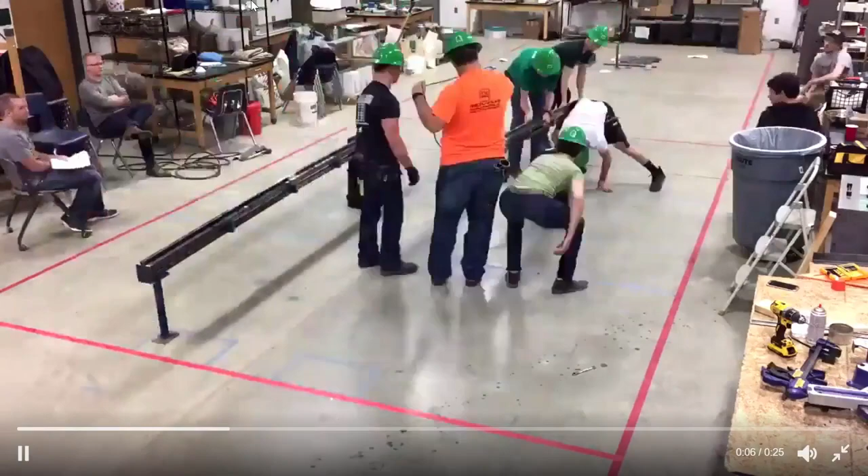Speaking of, I figured I'd show everybody. Here you can see this is back in the old engineering building. They've set up the staging yard, and you can see they're doing the construction. You can kind of see how they built it, they actually sort of built it diagonally and then just lifted it across. Ultimately, what took the longest time really was the bracing more than anything. The lateral system was a little more intricate than the main body of the bridge.

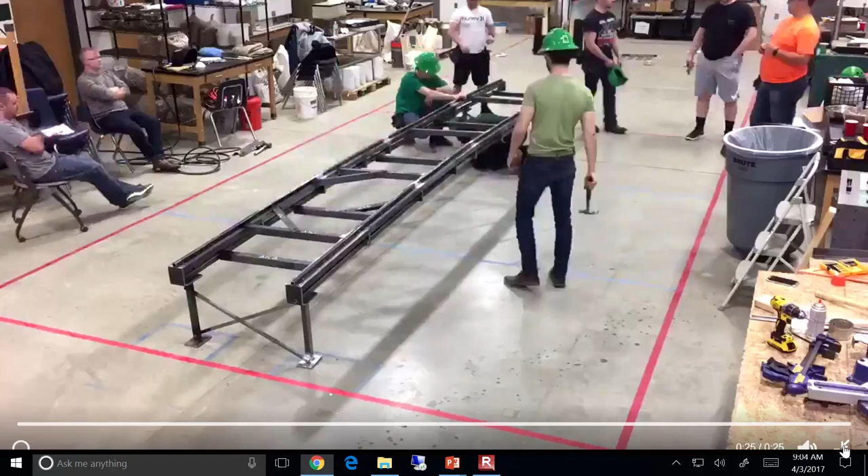But in the end, we scored fourth. We had a very respectable score on overall cost. Last year, I pulled the numbers to make sure I was accurate, and last year that overall cost would have gotten us to nationals. We had some really tight competition this year, but all in all, the students did very well.

My final message is that for those of you who'll be here next year, my dare for you is to do better. In other words, the bridge this year got a cost of, what was it, $26 million? So you all do better, you know what I mean? So if you're interested, now's the time to get involved, now that you maybe have a little bit of experience with steel, bolts, welds, columns, beams, and whatnot, you can help out. But the team did a great job, and I was tickled.

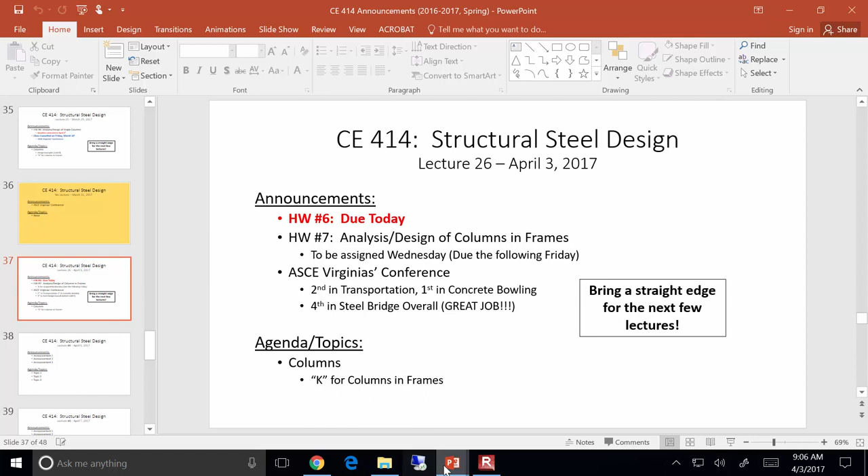With that, let's get into our discussion today of columns and frames. Okay, so last time we discussed the difference between a singular column and a column that's part of a larger frame. If you recall, we had braced frames and moment frames, really the 2 big lateral resisting systems to consider.

The big thing is that this column, for instance, in this braced frame, is designed differently than, let's say, some of these columns back here. Some of those columns are just part of the gravity load resisting system of the building, so they're all sort of designed as if they're individual. In most cases, you can take K to equal 1 and just go with it.

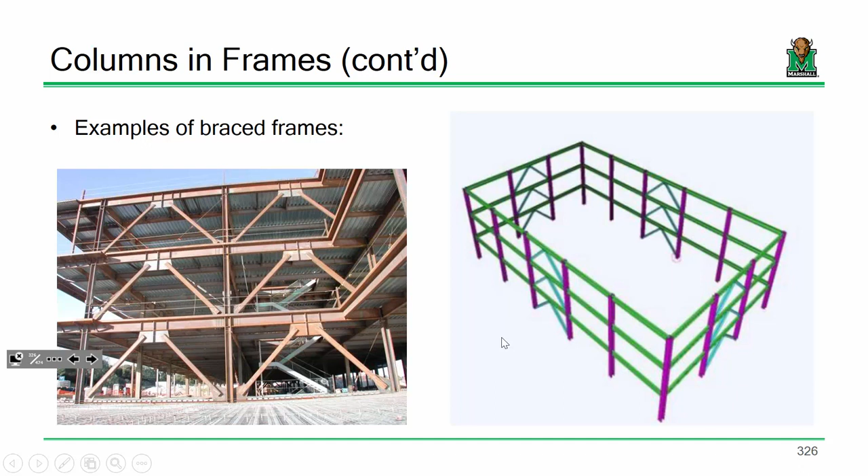But brace frames and moment frames are handled a little differently. Now, is everybody clear on the difference between what a brace frame is and what a moment frame is? Is everybody okay with that difference? Everybody good? Okay.

Now, one other main identification I want you all to be able to make is the difference between a simple shear connection and a moment connection. These moment connections on the right are the ones you'll see in moment frames. The big difference is that for a moment connection, your flanges are connected to the column as well. For a simple shear connection, you're only connecting the web, so that connection is there just to transmit shear, not moment.

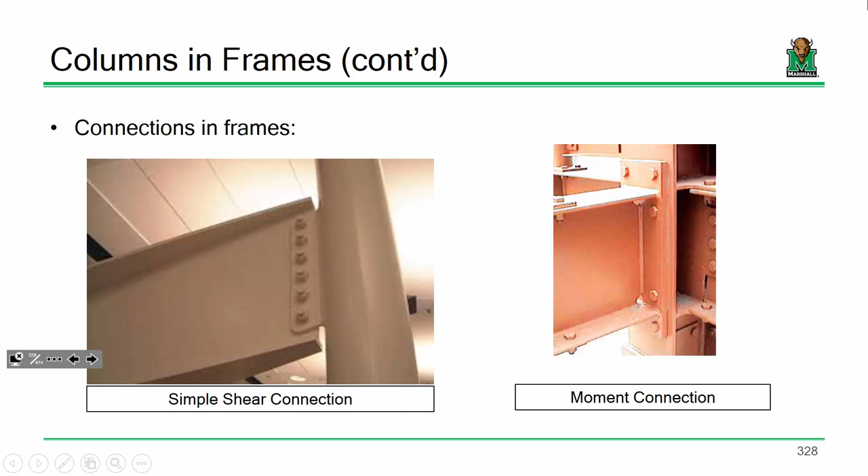Sound good? Okay. Now, I wanted to go back to this. I want to identify a couple of analytical effective length cases and relate that to how columns in frames behave.

I want to start this analysis by looking at case A and case B. Case A is a column fully fixed on the top and fully fixed on the bottom. If you do the analysis and solve the differential equations that I know you all love to solve - remember, what's the college student's number one tool for solving diffy-q? Was it Wolfram Alpha, right? I know things.

For a fully fixed column, theory states that your effective length factor K is 0.5. Now, if you take one of those supports - top or bottom, doesn't matter - and pin it, the column gets a little more flexible and buckles under a lower load. We represent that through a larger effective length factor - in this case, 0.7.

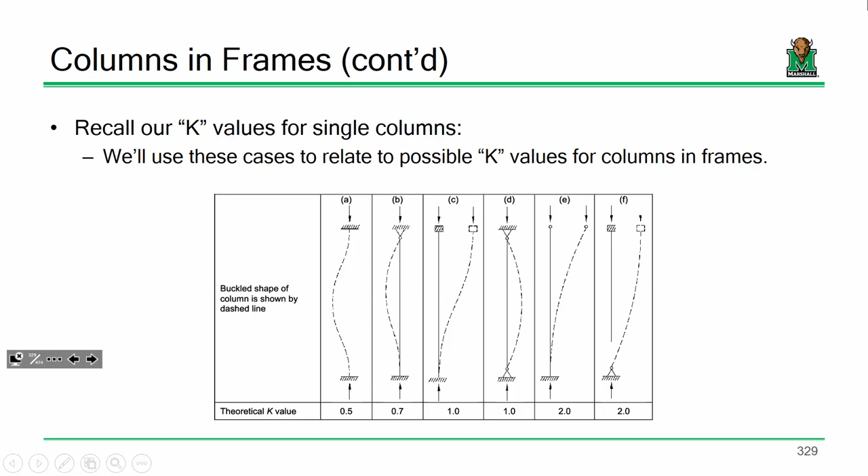Everybody okay with that? Well, my question is, how does this behave? This is a fixed end - is that fixed? Is that pinned? Maybe it's somewhere in between. Everybody kind of get what I'm talking about there?

So I propose that if you have a braced frame where the support is fixed, and I'm looking at the effective length factor for this column, it's not 0.5, it's not 0.7 - it's probably somewhere in between, and it's dependent upon the stiffness of all the elements framing into this joint.

Same thing if I pin the bottom - I've got a pinned support down here. This isn't fixed, this isn't pinned, it's somewhere in between. So it's probably somewhere between 0.7 and 1.0. Now that's for brace frames.

You can conduct a similar analysis looking at moment frames. If I have a fixed support and members framing in up top, it's probably somewhere between fixed-free and pin-free, so somewhere between 1 and 2. And if you have a pin support on the bottom, it's probably somewhat bigger than 2. Analytically, theoretically, it could go all the way to infinity, although that really wouldn't happen in a practical setting - the math allows that.

For practicality, we have ways of avoiding that which we'll discuss here in a little bit. But everybody okay with the theory so far? What I'm really trying to get at is that for a braced frame - and what I mean by a braced frame is one where the side sway, the ability to move left and right, is inhibited.

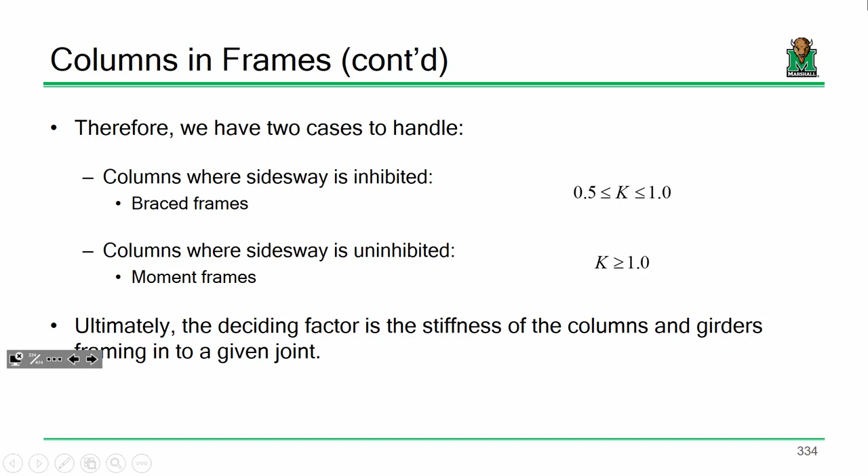Again, ultimately the deciding factor is the stiffness of the columns and girders that frame into that connection. So what I'm going to do is throw out a term called G. And G stands for what I'll call a rotational stiffness parameter.

Now, if you remember from structural analysis, the term EI over L tended to pop up a lot when we were talking about beams. It's essentially a measure of how stiff an element is in relation to bending, so it's flexural or rotational stiffness. If we were talking about axial stiffness, it might be something like AE over L, the area times the modulus of elasticity. If it was GJ over L, it'd be torsional stiffness. Y'all remembering these terms? I know it's been a while, but I know that you use them.

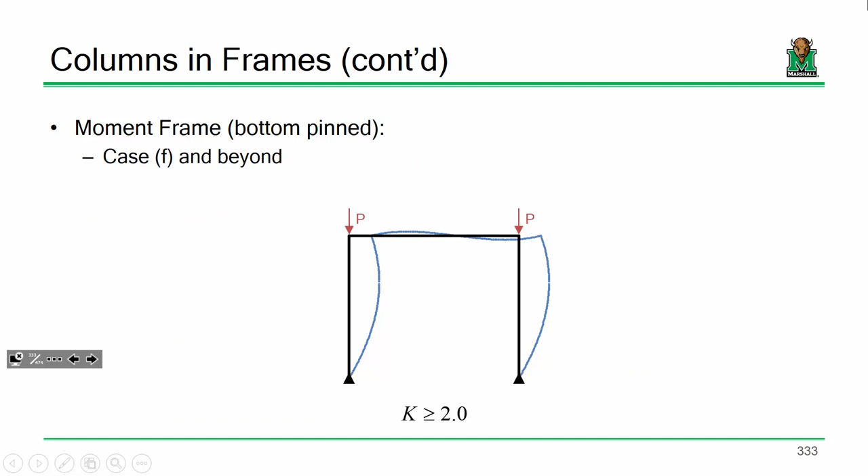What I'm going to do is define a rotational stiffness parameter for a given joint. So for instance, if I'm looking at this frame and this column, I'd have a G value for the top joint of the column and a G value for the bottom joint. Now I'm going to say that G is the sum of all the stiffnesses of the columns divided by the sum of the stiffnesses of all the girders.

So add up all the EI over L values for the columns and add up all the EI over L values for the girders and just divide them. Now, the nice thing about dealing with this type of math is this is steel design, so everything's made of steel, and if everything's made of steel, it has the same E value, so we could just cancel that out. So instead of dealing with EI over L, we can just deal with I over L. Everybody okay with that? Everybody good?

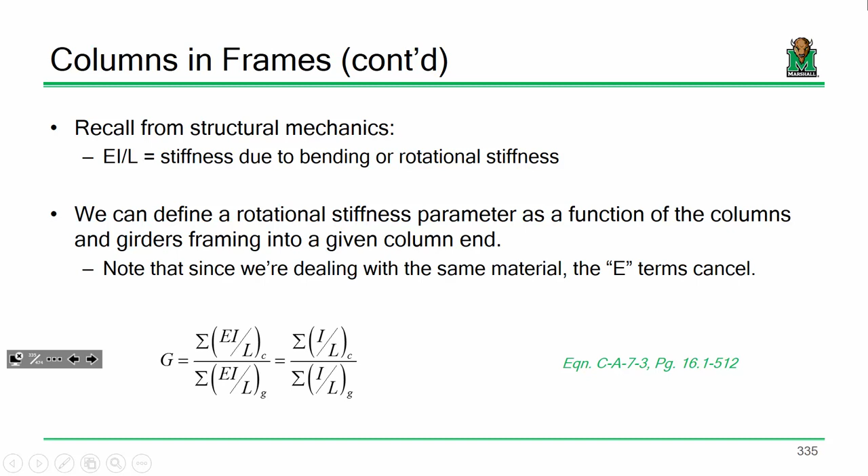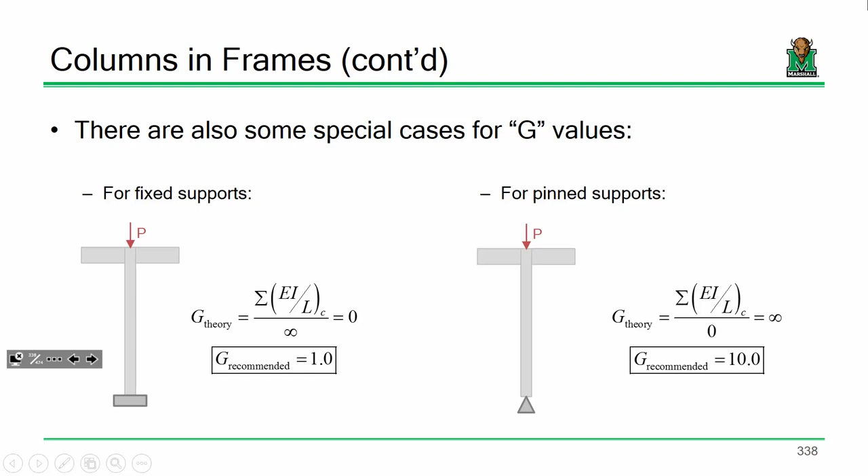Now, there are a number of assumptions that go into the development of these alignment charts. I know some of you are probably thinking, well, you gave us the moment frame chart, where's the brace frame chart? I'm going to get to that here in a little bit.

There are a number of assumptions that go along with these alignment charts, and if you have a really complex building, sometimes alignment charts just aren't going to work. We make assumptions - that the members are prismatic, all the columns buckle simultaneously, et cetera. If you've got a really complex structure, these alignment charts probably aren't going to work, and in those cases you're probably just going to have to break out some three-dimensional software, use some more refined methods.

Methods like direct analysis or something like that - that's where grad school comes into play. This will get you through most basic moment frame columns.

Now, one of these elements can be adjusted very easily, and that's elastic behavior - I'd say that's a very important one. If you remember, our column curve has an inelastic behavior component and an elastic behavior component. And the inelastic has that 0.658 raised to the Fy over Fe, all times Fy. Most columns that we design fall into that inelastic range. Well, these alignment charts are all assuming elastic behavior, so that's wrong.

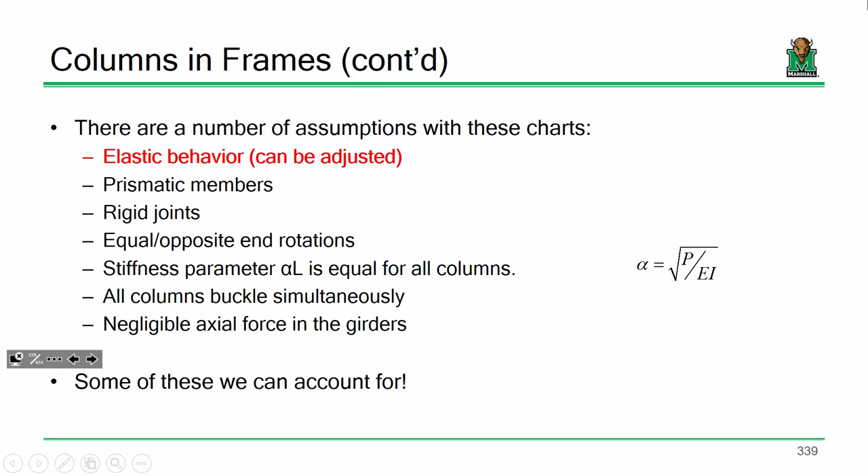We can adjust that very easily through the use of an inelastic reduction factor. Now I'll show you how this works.

The idea is that we recognize that elastic buckling is pi squared E over KL over R squared. Well, for inelastic buckling, remember that the stress strain curve goes up, and it teeters off a little bit before you get that full yielding? Well, in that yielding, in that inelastic range, we have that not the Young's modulus, but that tangent modulus sort of following along that curve.

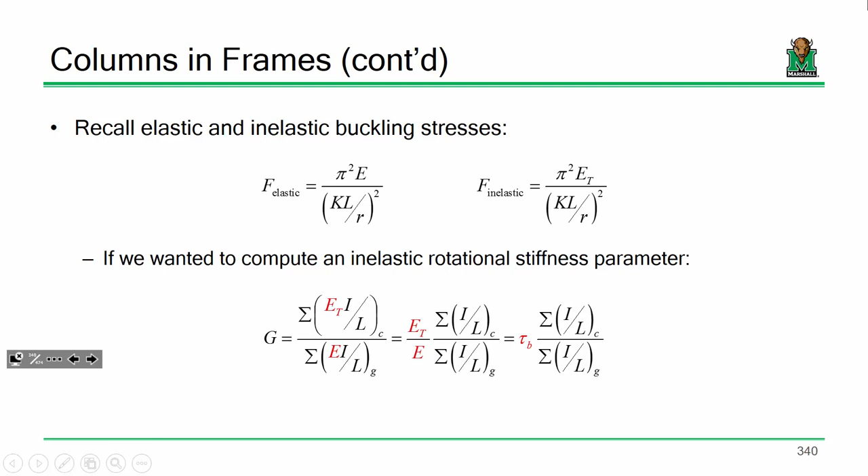Well, if you go through and plug in, instead of EI over L, that tangent modulus, we can come up with a reduction factor called tau that we can use to account for that inelastic behavior. It's pretty easy, a pretty plug-and-chug expression. Tau is a function of how much stress is on the column.

What are we talking about? I think we're getting too complicated. If I load a column with Fy*Ag, what has it done? Yielded - there we go, that's the yield load, right? Now Pu is the load that we're actually putting on the column.

So let's come up with some numbers. Let's say it takes 200 kips to yield a column, but I've only got 80 kips on it. So I take 80 divided by 200 - that's going to be less than this, right? But think, if it takes 200 kips to yield a column and I've only got 80 on it, I haven't come close to yielding it at all, have I? No. So in that instance, I shouldn't have any inelastic reduction at all, and tau's just 1.

If, however, I do have a substantial load - let's say it takes 200 kips to yield that column and I'm at 190 - well, we're probably going to have some inelastic behavior, or get close to it. Remember, the curve sort of teeters, especially when you consider residual stresses and imperfections in your column. When that value gets over 0.5, tau's a pretty plug-and-chug expression. Any questions?

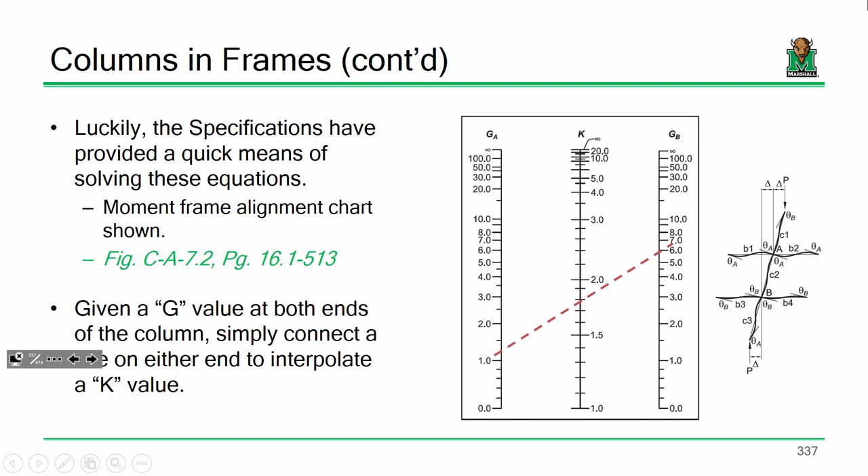Which is definitely worth doing, because let's follow this mathematically. If tau is less than 1, then your G values are going to get smaller, right? If your G values get smaller, what happens to K? Does it get smaller? Yep. So if K gets smaller, what happens to KL over R? It gets smaller. Now if your KL over R gets smaller, what happens to your capacity? It goes up, right? Because remember, KL over R is your slenderness. The lower the slenderness, the stronger the column, right? So if all it takes is a little bit of math to squeak out a little more capacity out of your column, do it, right? Make sense? Any questions?

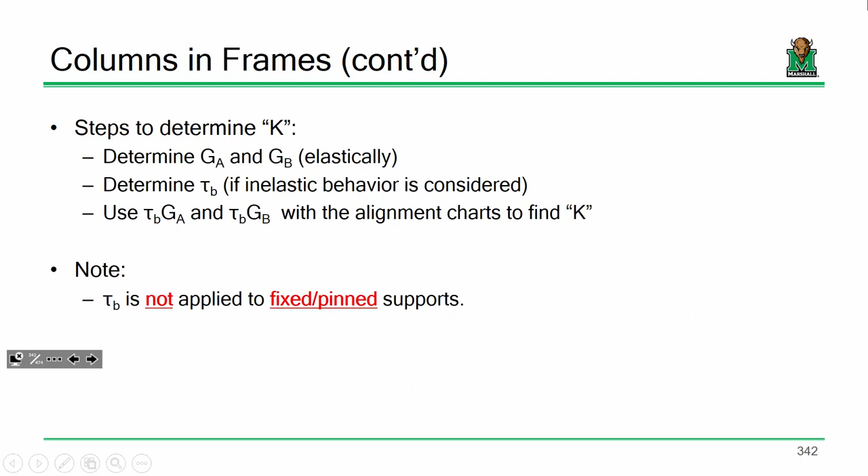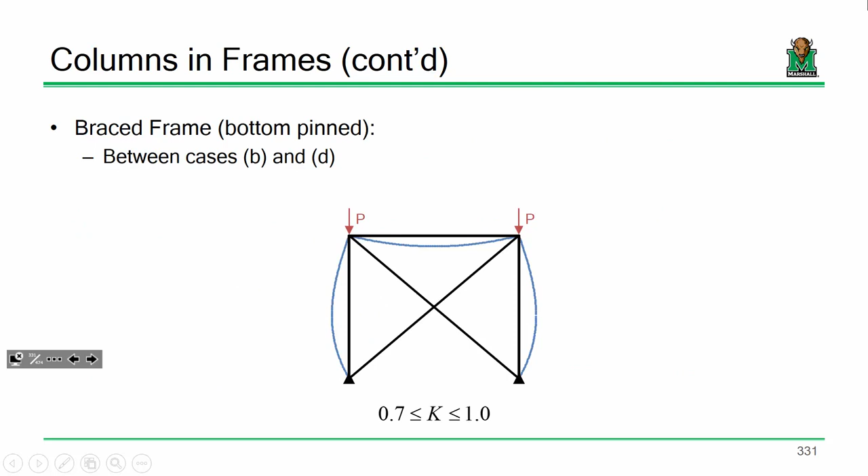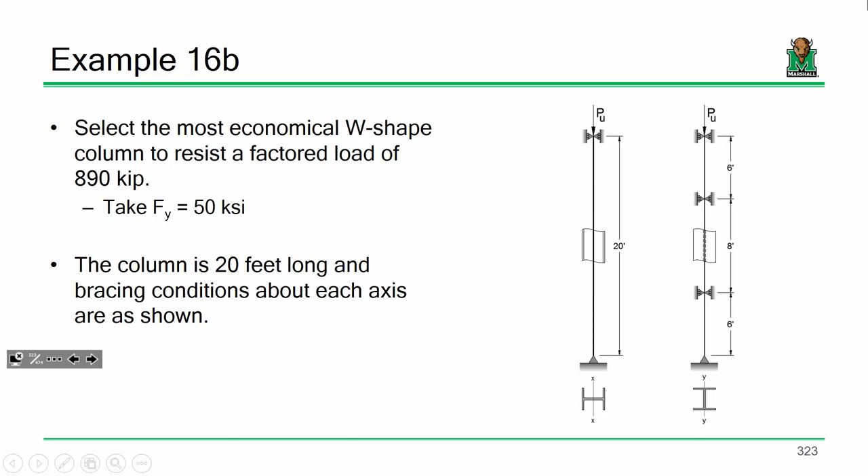That's good. Now let's talk about our axes. Are we looking at the strong axes of these columns or the weak axes of these columns? How about this? Remember this symbol right here? Take a look at this. What's that and what's that? Those are the flanges. Remember this? Strong axis, weak axis. So what axis are we looking at for this frame? There we go. All right. Okay, now we're getting somewhere.

All right, let's delve into that a little bit. So what I'm proposing is this: because all of these columns are all facing the same way, when we use this alignment chart to compute K, we're only going to be computing KX, right? In other words, K for buckling, the columns buckling this way, right?

Okay, now what about the columns buckling this way? What I'm going to do for this problem is have you all assume that the frame is a braced frame in this direction. So it's a moment frame this way, braced frame this way, okay?

Now what I want you all to do is open up your manuals, and I want you to turn to the section of the code that had those K values in it. Okay, now does everybody see those K values? Now turn the page. Oh, look at that.

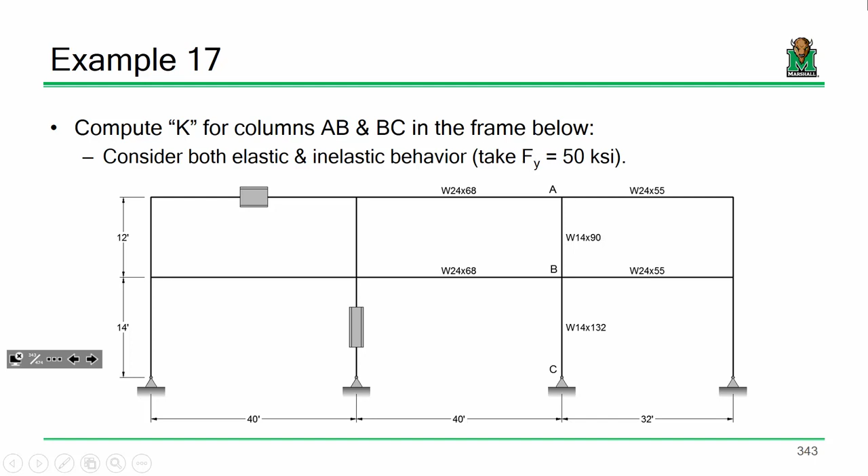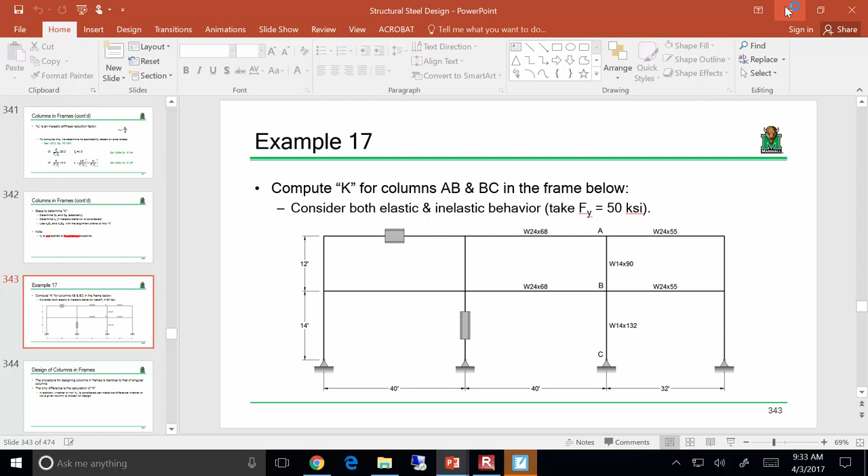Okay, while we're at it, let's go to table 1-1. We're going to need some moments of inertia, and I'm going to have you all look them up for me. Some of you look up the W14s, some of you look up the W24s, because we've got W24s and W14s. Notice everything's a different size. I wanted you all to make sure you're comfortable with your bookkeeping, since we've got a bunch of different cross-sections to consider.

All right, so we're on example 17. Okay, so we're going to need section properties.

All right, so let's see what we've got. The W14 by 90 and the W14 by 132. We're going to need Ix. Does it make sense that the W14 by 132 is on the first story and the W14 by 90 is on the second story?

Columns on the bottom see more load. So what are our Ix values? Let's start with the 14 by 90: 999. And 1530.

All right, what about the W24 by, was it 55? I didn't do you all any favors with this one because these are so close, right? 1350 and 1830.

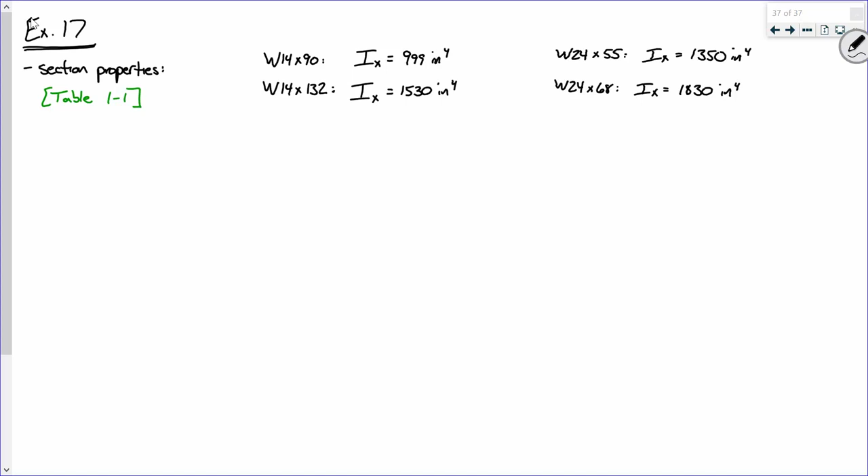All right, sound good? Okay. So what we're going to do for our notation is we're looking at column AB and column BC. So we're going to need a G value for each joint, so I'm going to calculate a G sub A, G sub B, and a G sub C. Now let's keep in mind, we'll call this just the G values. Remember, G is just the sum of I over L for the columns divided by the sum of I over L for the girders.

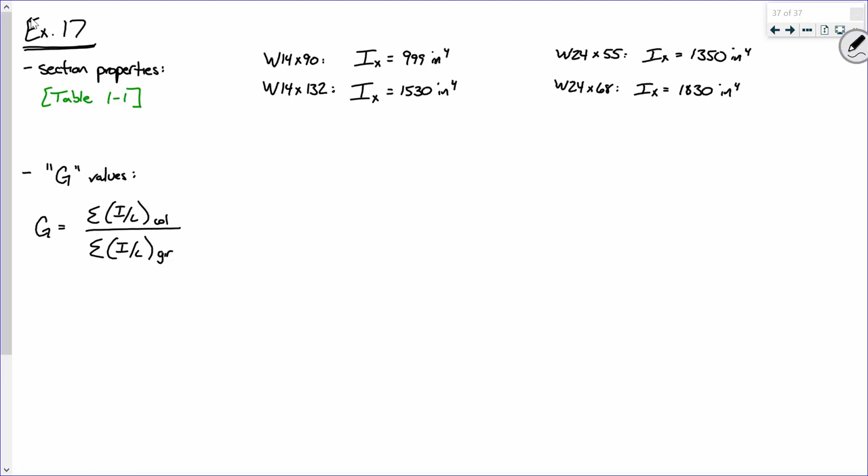So let's start off with joint A. How many columns frame into joint A? One, there's only one column in joint A, right? Which column? Well, what shape is that? 14 by 90. So 999 inches to the fourth divided by, what's the length of that column?

Just tell me what the length is off the drawing. Watch this, I'm going to leave it 12 feet. Oh. You see it. Now, how many girders frame in?

Two. So tell me, let's do the one on the left. Is it a W24 by 55 or 68? So 1830 inches to the fourth divided by, how long is it? 40 feet. Plus the 1350, see.

Divided by how long is that one? 32 feet. So right there you were saying, I'm going to convert it to inches, okay? It doesn't matter, right? Because you're taking inches to the fourth over feet divided by inches to the fourth over feet. It all cancels out. That's the nice thing about rotational stiffness parameters: everything is consistent with your units.

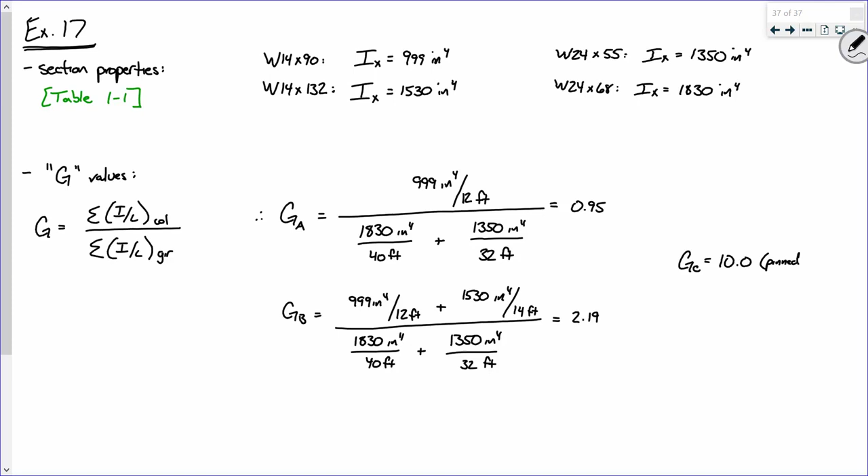All right, does that make sense? Okay, now let's use our alignment chart. I'm going to call these elastic K values, and we're going to say in the X direction.

All right, so let's start off with column AB. So GA is 0.95 and GB is 2.19. So what you're going to do is go into your alignment chart, 0.95 and 2.19.

Now you all have your alignment charts, right? And you all, of course, brought straight edges, right? Every one of you, right?

So what is your KX? Now watch this, I'm going to say KX is about something. It's not exact, it's about 1.45. What do you get?

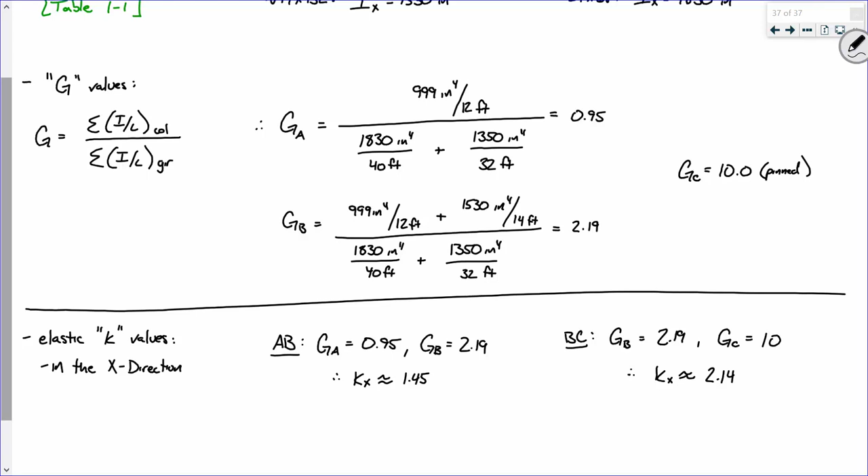All right, does anybody have any questions? Okay, now those K values, we can drop them a little bit if we take into account our inelastic stiffness. Okay, now I'm going to show you how this works. Does everybody have all this?

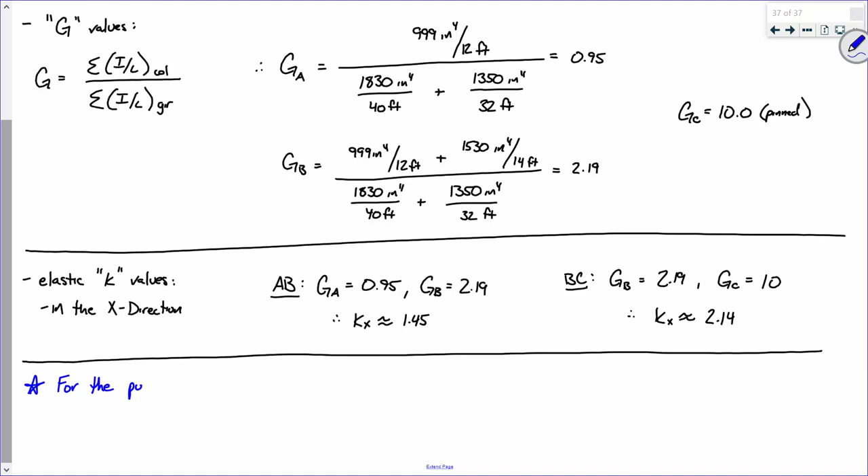Okay, so let's make an assumption, for the purposes of this problem, assume the following. So let's say you ran your RISA analysis or did your structural analysis, and you get that for column AB, the design load is 1050, and for column BC, your design load is 1370. So I'm just giving you some loads for the purposes of seeing what's going on with these columns.

Can we do a little better on our K values? Remember, we want our K values to be as low as possible. Lower K means higher capacity. All right, everybody good for this?

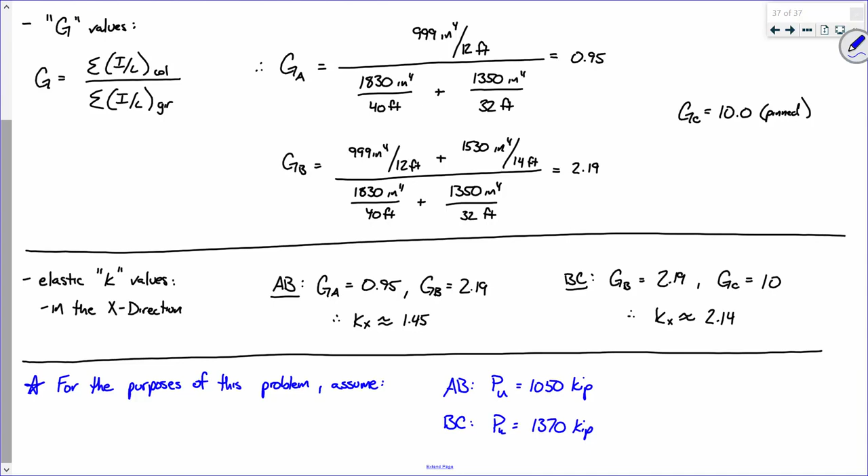Now, can I go ahead and go on to the next slide? All right, in order to do K values using inelasticity, I'm going to need areas for each of those columns. So we'll say tau values.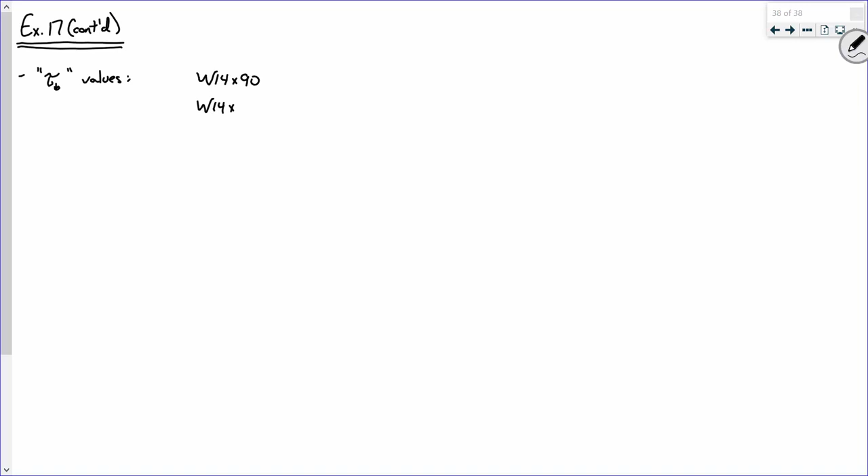So for the W14 by 90 and the W14 by 132, what are the areas? Okay, sound good?

It doesn't really stand for anything. In the simplest term possible, I'll say this: tau values are empirical expressions, and they've undergone changes over different editions of the specification. So they handled that by just calling them with different subscripts.

So we're on B. I'm telling you, that's really it. In the previous manual, they said tau sub A. I'm not kidding. I hope they don't change this 26 times. But by doing that, you're encouraging them to change this 26 times.

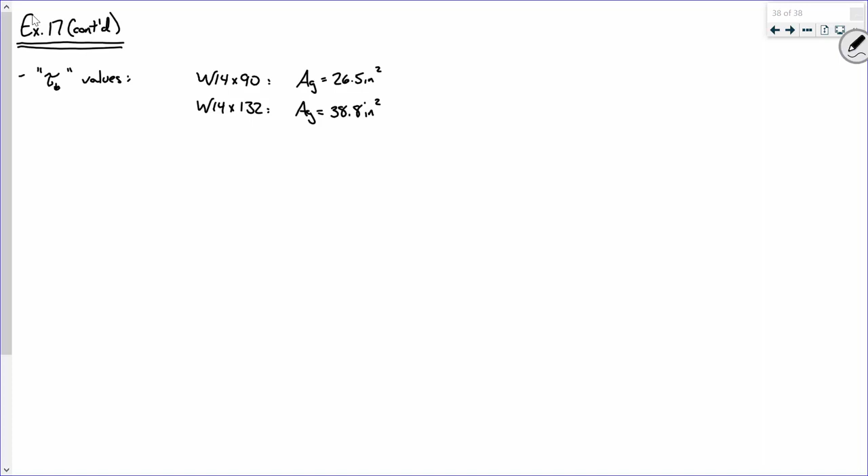All right, let's take column AB first. Let's take PU over FYAG.

And from here on, I think the slide says 50 KSI, but from here on out in this class period, when in doubt, FY is 50, because all of our design aids are going to be referenced based on 50 KSI. So AB has a load of, we said, 1070 kips divided by 50 KSI times 26.5.

What? Did I say 1050 or 1070? 1050. Yeah, I said 1050, I'm sorry. So we're back up to 76? No, I'm going to write that clear. 1050, that's close enough. All right, so what do we get for this?

3 decimal places, we'll say. 0.792. Okay, so this column is seeing a load up until about, we'll say, 79% of its yield stress. So that means we're probably going to have some inelastic effects, considering the fact, again, we've got geometric imperfections, we've got residual stresses. So we're not talking about an A505 specimen in the lab, we're talking about a 14 or 12-foot long column or what have you.

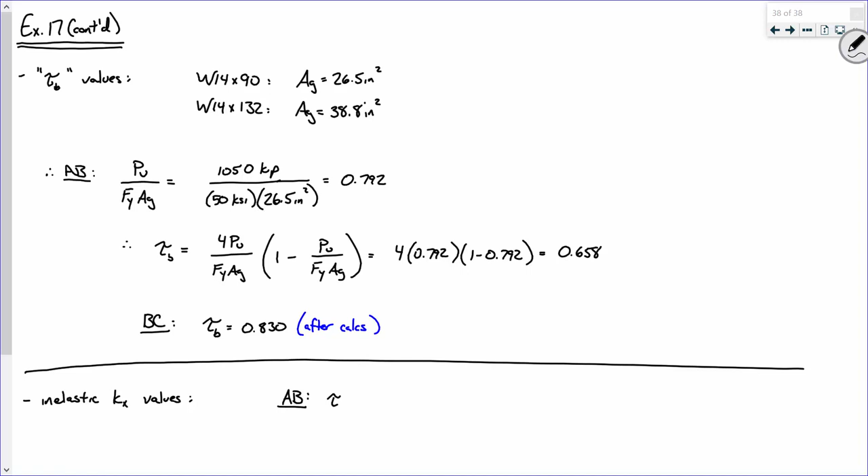All right, so now let's do, and then we'll call it, let's do inelastic Kx values. All right? So for column AB, we have tau GA, which is what? 0.658 times, what was GA? What was the original GA?

All right, what was the G value for B? 2.19. All right, so what do we got for this? 1.42, say it again, 1.44? Yeah, well, I'm going to say 1.45. Nah, just kidding, 1.4.

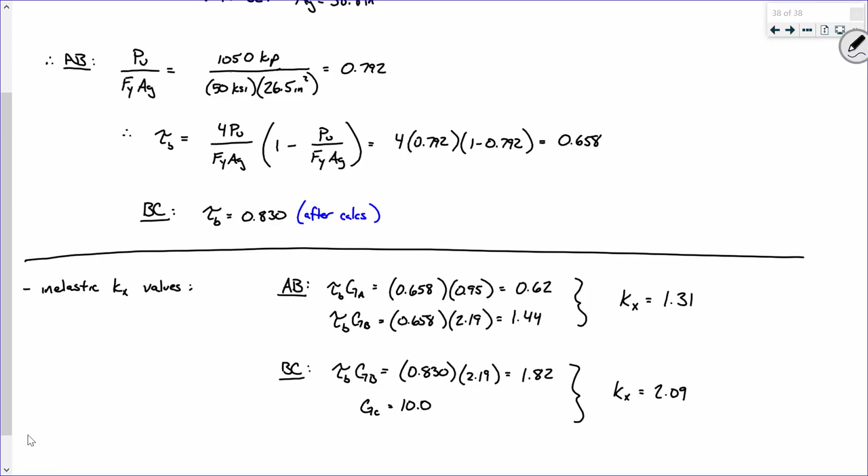No, we're not actually dealing with beef, like designing a slaughterhouse. Remind me of a Monty Python skit there. All right, that's all I got. I will see you all on Wednesday, or in a couple minutes.